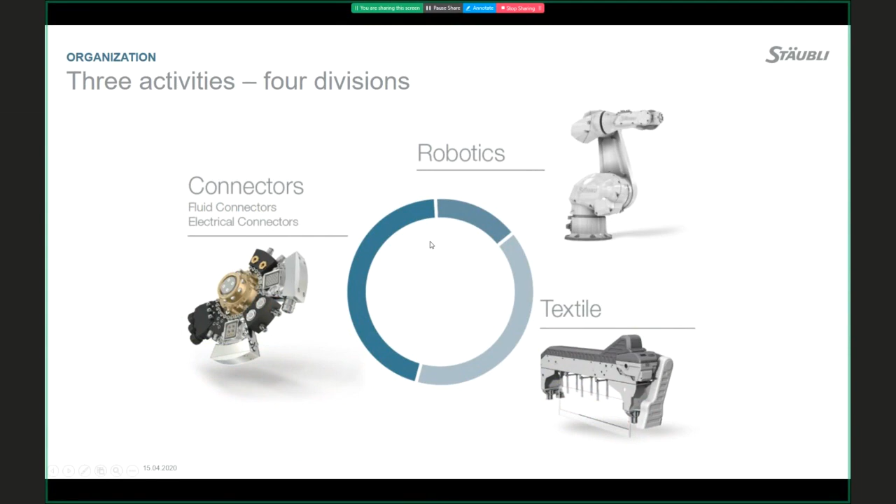Maybe you know the branch from Czech Republic, from Pardubice city. This is our building. We have about 100 employees to take care of Eastern Europe. We have 3 divisions: robotics, fluid connectors, electrical connectors. Also, you can have a chance to meet us with our demo van, where we have connector solutions and robots inside, and we can go visit you at your company.

STAUBLI Pardubice was established in 2005. Now we have 100 employees around Eastern Europe. You can see both companies are active for us. So we are active in Czech Republic, Slovakia, Hungary, Romania, Bulgaria, Slovenia. All of these countries we are active in.

You are probably separated into all these regions, so you have your corresponding sales engineer or technical engineer, so definitely get in contact with him. We have 3 departments: in Pardubice, in Komárno, which is on the border of Slovakia and Hungary, and in Bucharest in Romania. Also, we have a sales department in Slovenia.

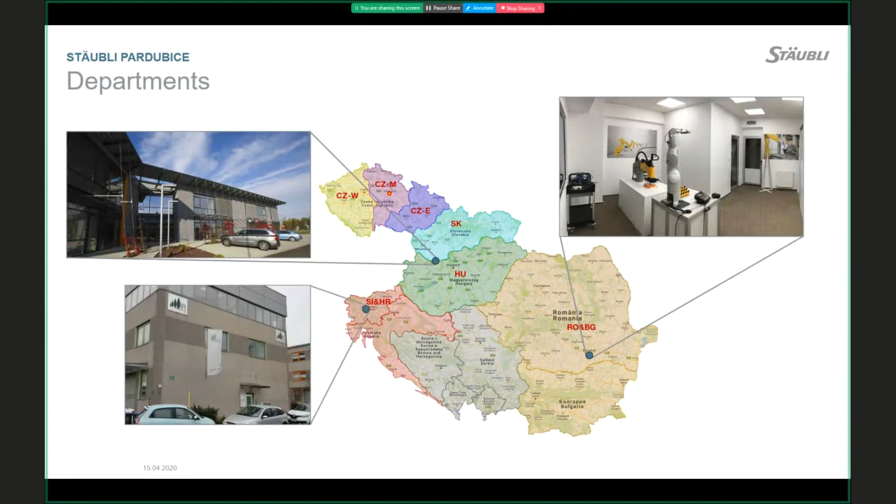Short information about the Department of Technical Sales Support. We provide technical support, verification of solutions, simulations, application support, and training with our local training centers. In every department there is also a training center with robots. So we have around 10 robots in Pardubice, 4 robots in Komárno, and also 4 robots in Bucharest. Also, you can check our websites to know what's going on with customer support and robotics training which we provide, and also you can use the shared email and phone for any questions, needs, or inquiries.

Also, I want to mention in the beginning, total cost of ownership. You probably know, or maybe not, that this term is really important for us. We would like to really take care of our customers with our products, which have a really low TCO, total cost of ownership. It means the complete price that you pay for the system. It's not just about the initial purchase price, delivery cost, and installation.

It's also about some training, consumables, payments per year, fees, repairs and spare parts, some regular service and maintenance fees, which you don't actually have with STAUBLI. Also operating energy and fuel. We will go through the slide where it really shows the energy consumption of the CS9 controller, which is really low. We also have extended warranty: 16 months basic, and if you register the robot, you get 3 months extra, so you have 19 months of warranty at basic from the standard. So I think this is quite good.

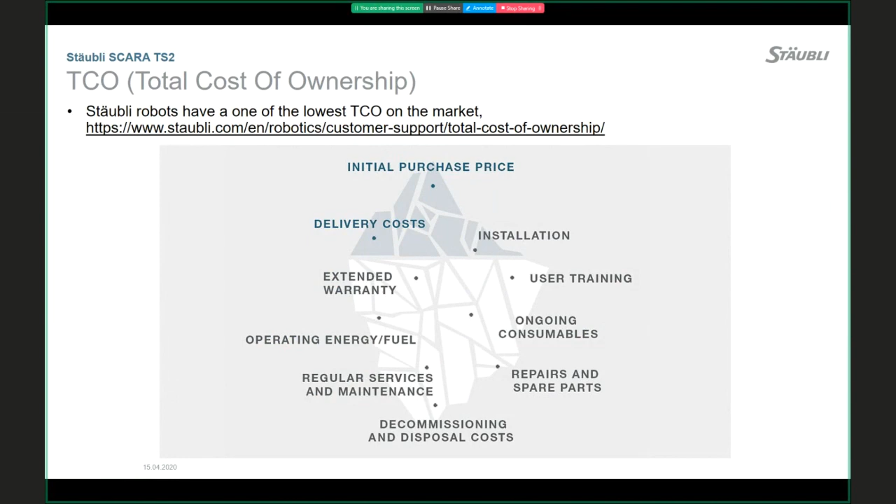We have simply a view of our system, and we can see the product range, which is from the small SCARA robot TS20 up to the new product range, as I mentioned, TS240 to TS2100.

We will have a really detailed presentation about SCARA robots, so I will leave it like that. For now, we have also a fast SCARA robot, TP80, which is used for tracking applications and really fast applications.

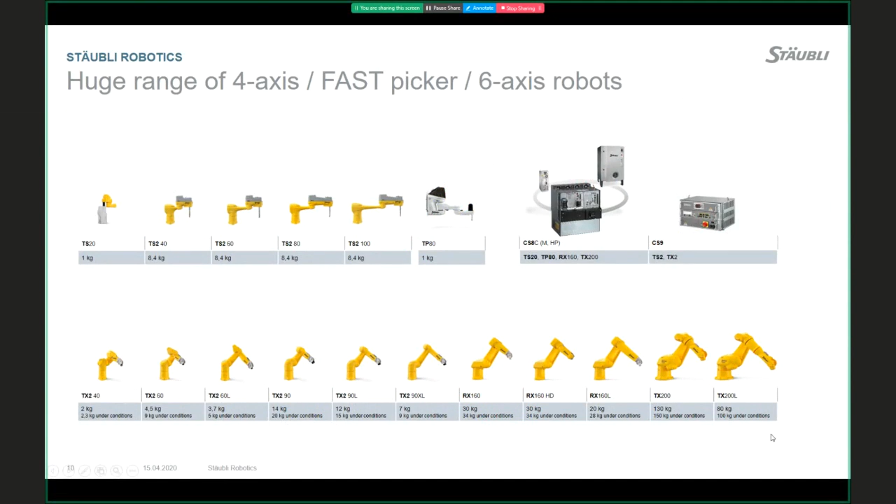We still have from the past the 3 controllers, but really the idea is to have one same controller for all systems called CS9. We will talk about it more in detail during the presentation. And also the 6-axis product range, which you can see below. So come up to the TS2 robot range.

Really nice product range from TS240, which has a 460 mm reach, up to TS2100, which has a reach of 1 meter. The reach is from the center of the first axis to the center of the ball screw.

This robot, like all our SCARA robots, has a complete cylindrical working envelope. It means plus minus 180 degrees. This robot can move around the complete workspace. This is unique. A lot of competitors always have some kind of gap, not able to go 100 degrees almost. So this is one advantage.

And we have a lot of information about our SCARA robots. You see that we have a nominal payload of 2.4 kilograms. It means without a flange, we are able to work under nominal speed with 2.4 kilograms in the whole complete range. We also have information about maximum payload with reduced speed. This maximum payload is 8.4 kilograms, which can be loaded onto the robot.

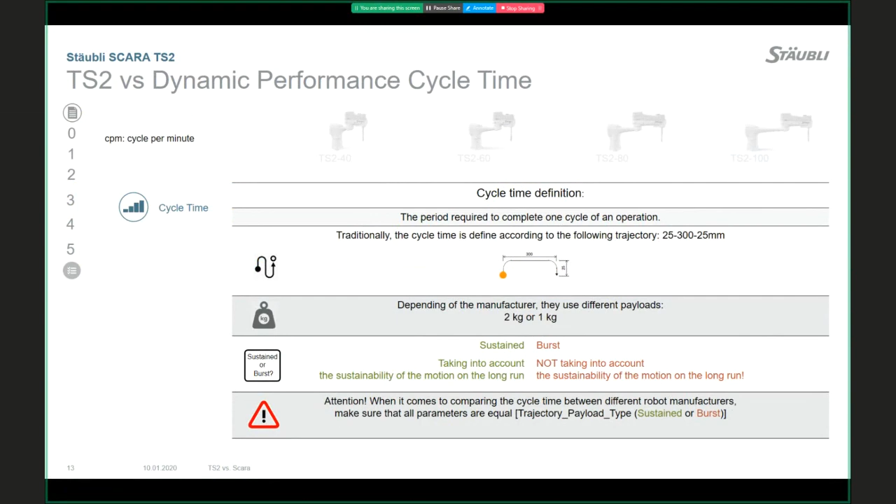Let's go to the hardware of the TS2 SCARA robot. Some of you may know SCARA robots, some may not. You will not find external cabling in our new TS2 product range. Everything is inside, which is really an advantage, right?

Our product range extends also to TS2100. You have a 1 meter working envelope. On axis 1 and axis 2, there is a Staubli gearbox, so we are the only manufacturer who is producing our own gearbox. You can see short videos of how it looks in the presentation cell with all SCARA robots: TS240, 60, 80 and 100. We will go through all the options later on.

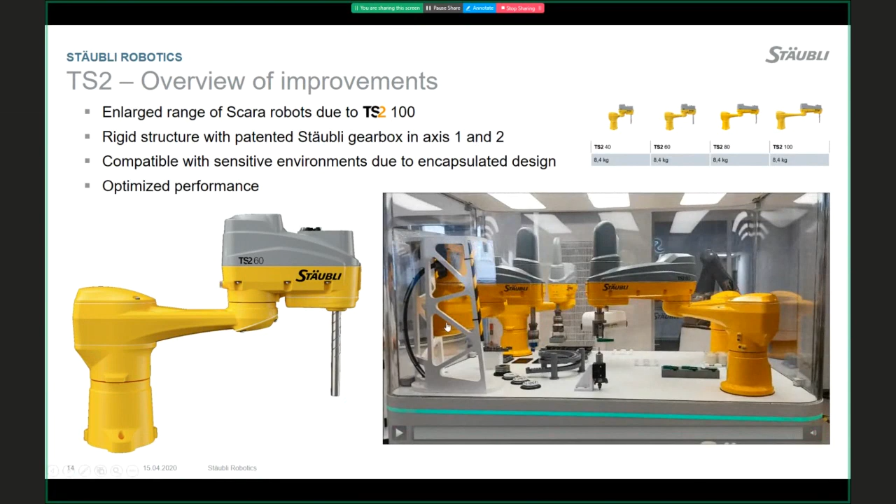You can see that TS2 can be mounted also on a ceiling rail. We are also able to offer you the pedestal on the rail. So we will go through that later. Next slide.

Some basic features: the footprint is really small, like a TX260. So if you have already designed a pedestal for our robot STAUBLI TX260, you can use the same structure.

As I mentioned, we have on axis 1 and 2 the JCS gearbox produced by STAUBLI and patented by STAUBLI, with absolute high-density encoder, which is really unique on the market. No batteries in the robot, etc.

Harness inside, closed encapsulated design, motors inside, and from the standard, if you would like a standard robot, you will have your pneumatics and electrics connections on the forearm. There is also an electric circuit, including electric wiring plus industrial Ethernet Cat 5e.

Also, the design is really smart. You see that all screws are face down. It means no stacking of dirt on the screws. So really clean and hygienic design.

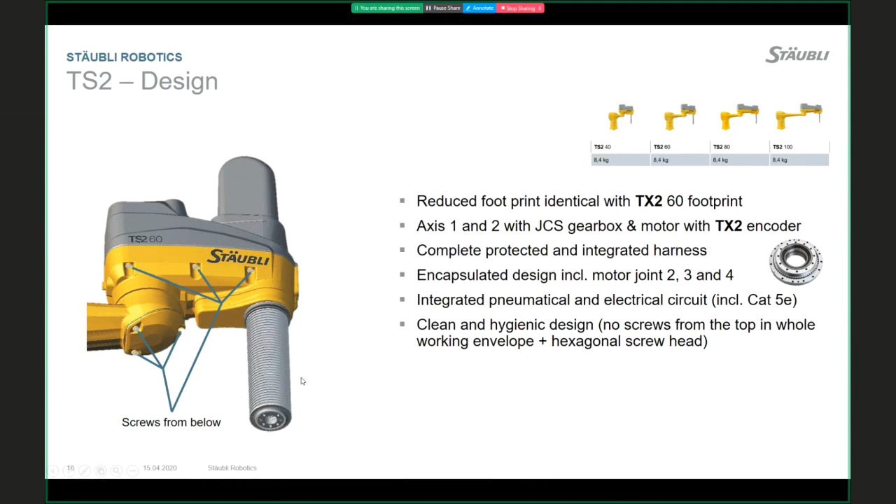You will see a lot of environments can be handled by this robot. So really optimized maintenance - just 4 covers to remove to maintain the robot. It will save your money on production.

You also have practical holes on the robot where it's possible to mount additional loads. So you can use, for example, some Profinet bus linked on the robot, or external valves if you need extra valves, or a camera on the forearm - up to you.

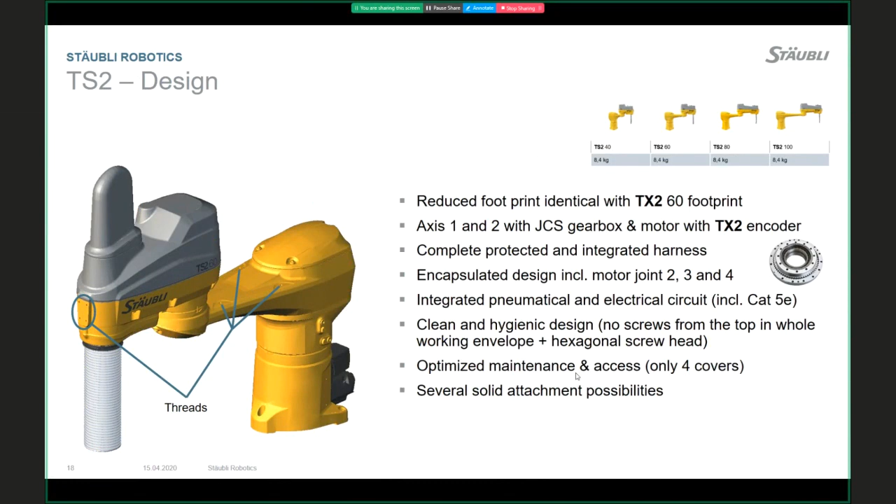Ready to use solution. So if we go to the standard electrical circuit, from the standard, the robot has a direct connection to the foot, which can also be unmounted. You can unplug the cable. But the foot looks like the standard definition of TS2, like that.

There is a 5 meter interconnect cable with gland connection - this is called gland connection. Also from the standard, you have connectivity of pneumatics and electrical to the forearm. There are power lines, signal lines, and Cat5e cable as I mentioned. So this is from the standard.

From the standard you can have no valves, but we as STAUBLI for Eastern Europe, we are providing valves to the robot if you want. So standard is the direct tubes, 3 direct tubes from the base to the forearm.

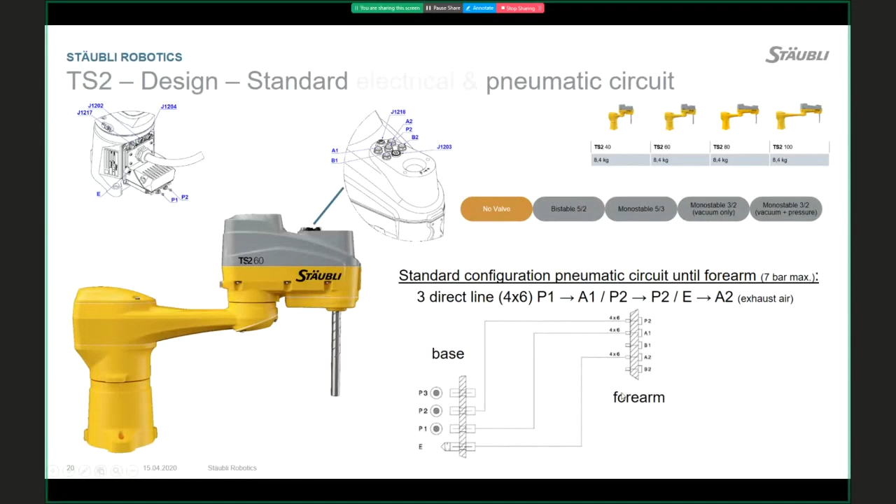If you want to select our option, the valves are located on the back of the base of the robot, like on the 2 axes on the top. There are 2 valves, so it can be 2 5/2 solenoid valves, and you always have an extra direct tube. It can also be 5/3 solenoid valves, always with a free tube on the P2 connector. They are monostable - if you have 5/2, they are bistable.

Also, you can have vacuum in the robot - a 3/2 vacuum system. It's like that. And a new option is the monostable 3/2 vacuum and pressure also, so you can have one valve like vacuum and one valve like pressure. So it uses P1 and P2.

And you can select it if you want from production. So this covers the features about pneumatics, and now we can talk more about the flange option on the ball screw.

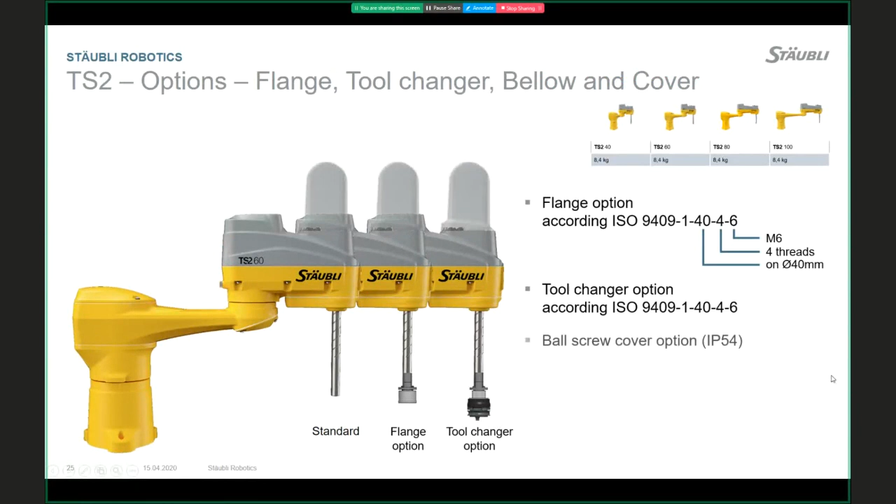Standard is without flange - you can select your flange option, your ball screw cover option, and your bellows. For example, for the food industry, we want to have a robot in a hygienic environment. It means we need IP65, we need the ball screw cover, we need bellows, and we can have a flange or a tool changer - up to us.

Also important to highlight: from the standard, we have a load of the robot of 2.4 kilograms for nominal speed, and for big load, for maximum payload, we can have 8.4 kilograms but with reduced speed. Or we can do some verification of the cycle time and payload for you, and you can go even faster, but this should be validated by technical sales support of STAUBLI on the shared email, as I showed you at the beginning of the presentation.

So with the flange option, we lose 200 grams - we are at 2.2 kilograms. With the tool changer option, we are at 1.7 kilograms.

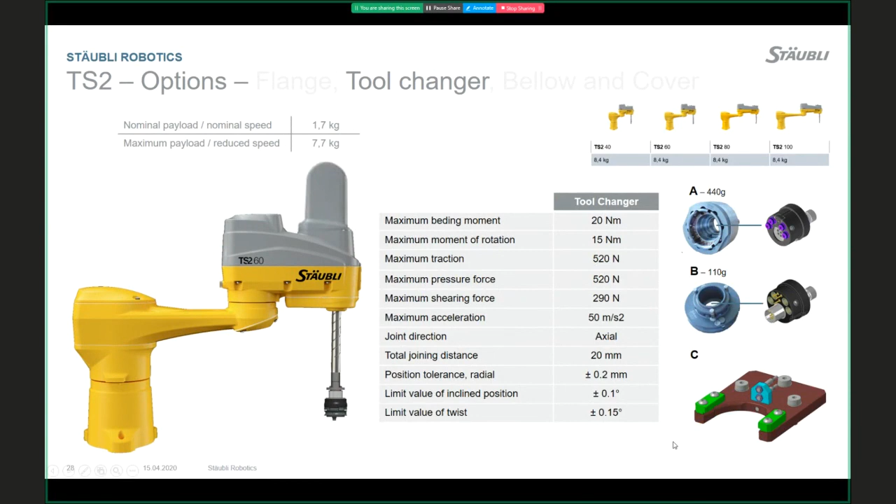We have a couple of technical details about the tool changer: bending moment 20 Newton meters, moment of rotation, maximum traction, pressing force, shearing force, acceleration, etc. Also position tolerance, it's like that. If you need more information, also contact our email for technical support.

The tool changer can be used like a static version. It means you don't need a docking station. You can have your robot side and 2 times tool side, and you can use your manual tools which we provide with the tool changer, and operate it by hand. So it can be done manually, or it can be done automatically by the program, by the robot, of course.

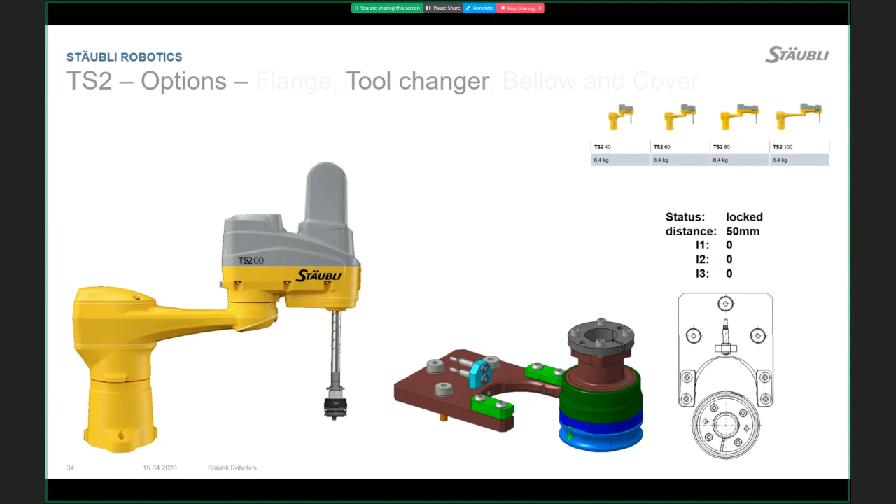So the idea is like that: approach the docking station, go to the tool side, lock the tool side to the robot side, go out. Really fast, honest. So just go to the tool changer, lock the tool side, and go out.

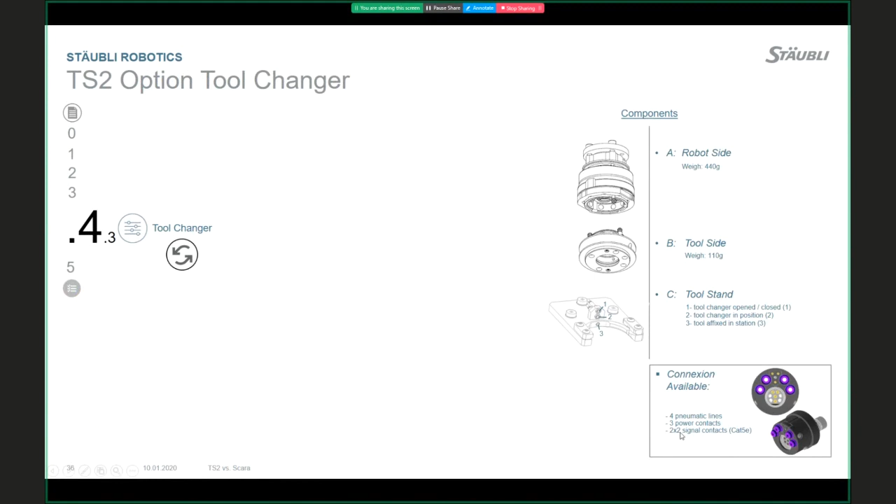So 3 components, A, B, C, as I mentioned. There is also integrated inside 4 pneumatic lines, 3 power lines, and Cat5e signal connections. Complete solution ready to use. It can be automatic or manual, working like a bayonet system. It really increases your flexibility and productivity of production.

We also have an application prepared by the STAUBLI robotics tools team, which is ready to use if you are interested in this option. Please don't hesitate to ask us, or ask your sales representative for this, or our technical support.

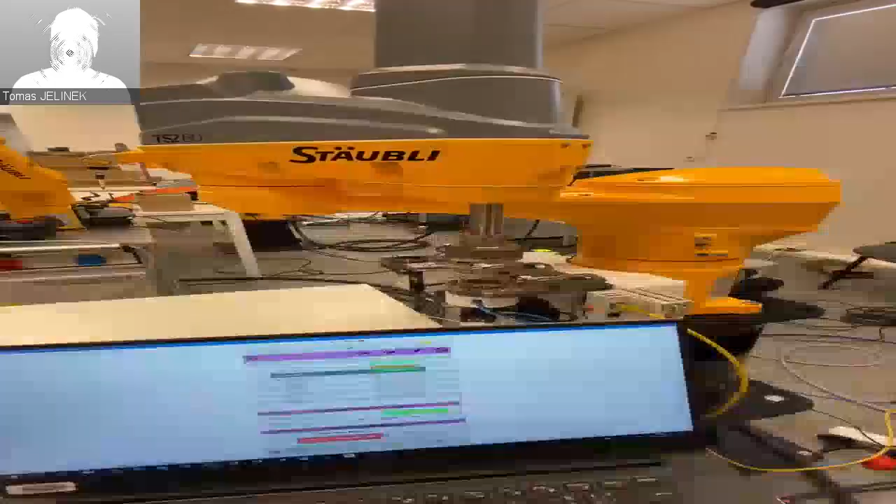The video maybe doesn't have extra quality, but I hope it's visible. We have prepared 3 docking stations with 2 tool sides and 1 robot side. We also have the STAUBLI Ethercat coupler to work with the signals.

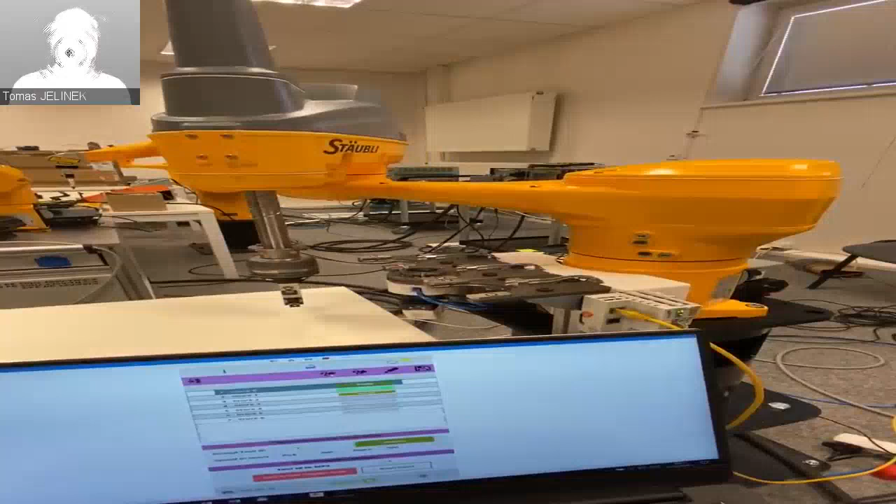We can operate the application from the SP2 or from remote access from the computer. Also it's possible. We just type which tool changer we want to use, and the application guides the robot exactly to the positions that we need.

As I mentioned, the application is ready for teaching the approach position, the frames of the docking station, and later on, approaching every point, it's possible to do it from the application.

So MPS, I hope it's quite clear. If you have a question, just ask in the chat. I will go through the ending of the presentation.

So we go through the options, more options which the SCARA robot has. There are really a lot of them. If you want to use a user interface, you can select the option directly from the base to the flange, and there are pneumatic lines and electric lines. A user interface is available only with the flange or tool changer, but also with the ball screw cover.

This is the top cover.

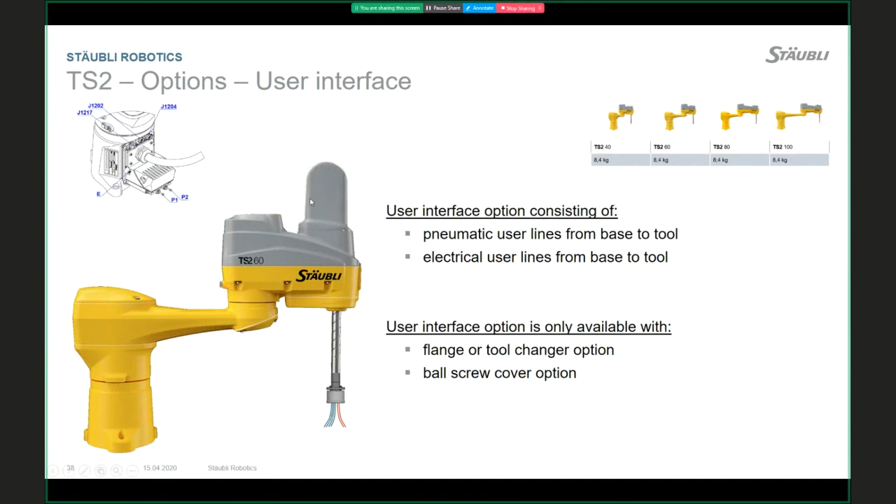So the user interface can be without valves, with flange or tool changer, with direct lines, or it can be with bistable 5/2 valves, bistable 5/3 options. And also the new feature, as I showed you, it's possible to select monostable 3/2, 1 valve from vacuum, 1 valve from pressure. Really interesting solution with flange or with MPS system.

So electrical interface on the flange: there are power lines, signal lines, and Cat5e Ethernet industrial cable.

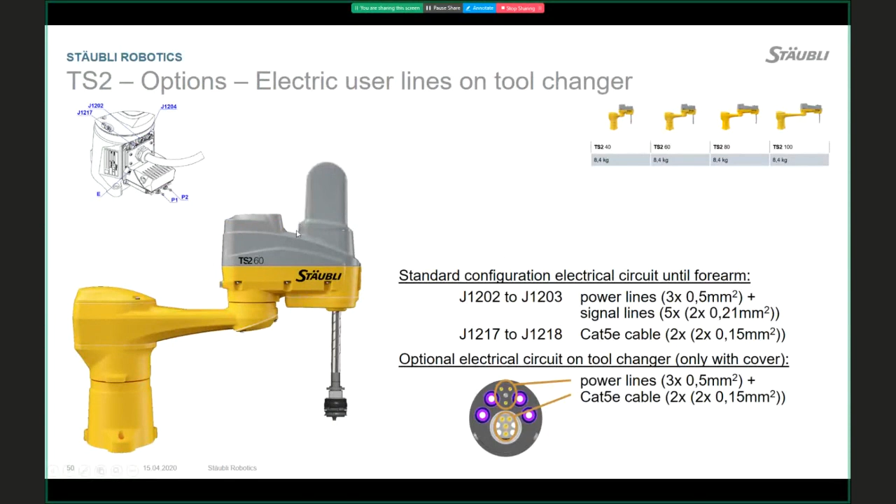In every option you can select if you want electric and pneumatic on the forearm, or with the cover on the flange with the flange solution, or with the MPS solution. With the MPS solution you always have just this socket, which is highlighted on this slide.

So you have 3 power lines and a Cat5e cable, and 2 lines with 2 wires of this dimension.

So the robot can be floor mount or ceiling mount. Also, which is our advantage, is arm connection under the base. The robot can have all cabling, the DSI board, and also pneumatics and interconnect cable from the vertical cable outlet.

We are also offering our certified H1 food oil and grease. It means that the robot is able to work in a food environment, can be in direct contact with the product, and will not contaminate the final production or final product. Certified H1 oil, ready to use with the robot.

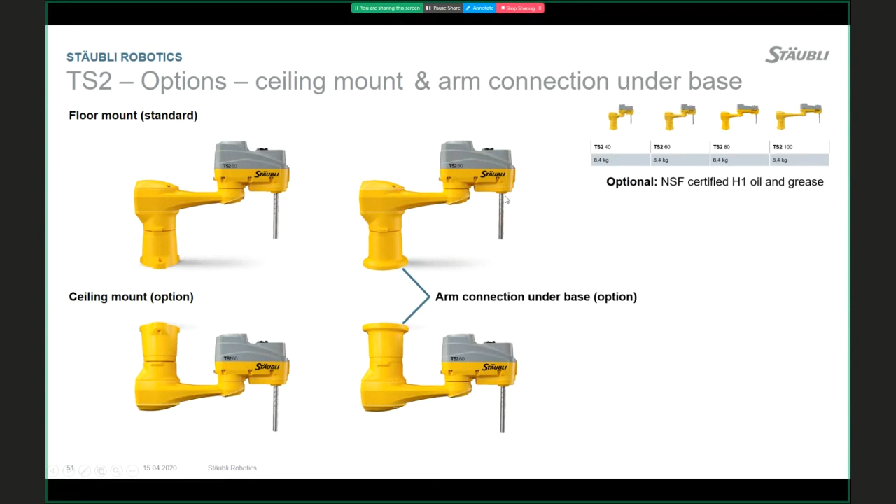It always depends on your application. The robot can be standard, just with H1 oil, or it can have a flange, cover, or bellows to cover the final product. So, as I mentioned, from standard there is a gland connection directly to the robot.

But as you probably know, at STAUBLI we have our product Combitac, an electrical connector which is ready to connect and disconnect maybe a million times. This is a really high advantage product, so you can select this Combitac connector as an option.

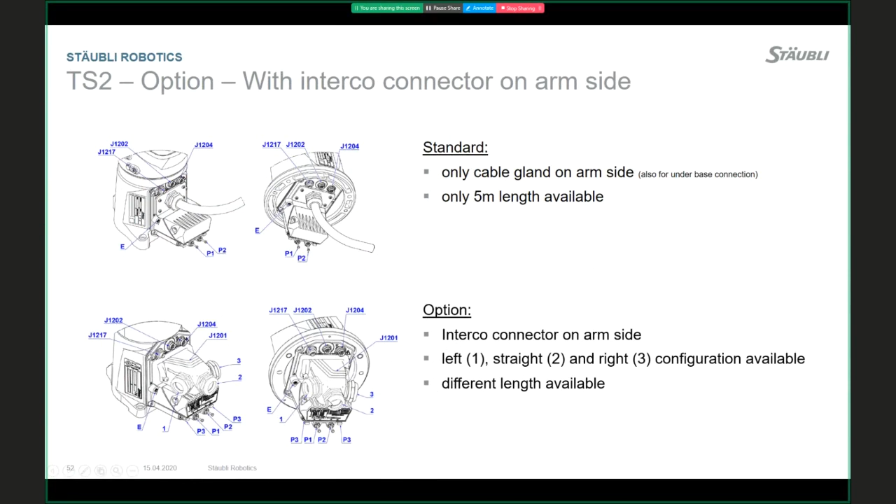Also you can select the cabling, from which side you want the outside cable: 90 degrees left, 90 degrees right, or straight. Also a vertical cable outlet is available for that.

You can have hard stop axes on axis 1 and 2, because for a small cell you need some safety verification and your robot has to stop somewhere. So you can use your hardware stops on the first and second axis.

No SCARA robot on the market has brakes on axis 1 and 2. Our R&D in our production unit is working on it, so during, let's say, 1 year, there will be an option like brakes on the first and second axis. But in the meantime, you can use your hardware stops to extend the security of your cell.

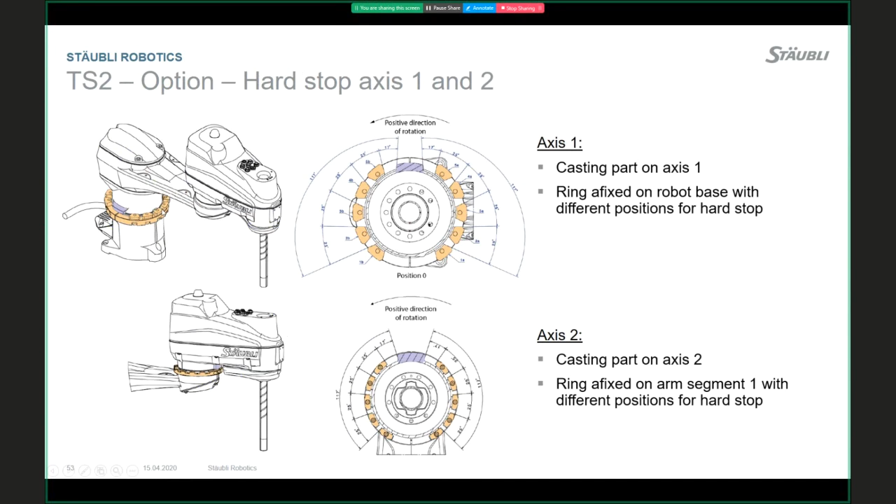You have a compact cell. Usually like a ring, you have casting on the axis which you just select, your segment where you want to stop the hardware-led robot, and you can do it like that.

System summary: as standard you will receive the CS9 controller with the SCARA robot TS2 and the manual pendant. If you have multiple robots, you can have only one pendant, and you can have the plug in the CS9 controller. This plug is called on-fly.

Now our CPU system can work for 30 seconds. You can disconnect your SP2 and your robot can still work in remote working mode. If you connect the plug during those 30 seconds, your e-stop is not cut and your robot is still working. So, a really good and new solution.

I would like to mention the environments we can see. The standard environment we call harsh environment, meaning standard automotive production, ISO clean room class 5 for the TX robot and also the TS2 robot. So this is the standard version with encapsulated structure, small footprint, identical cabling on the forearm for both robots, and integrated pneumatic, also the same on both robots.

Precise, fast, consistent. You can have the ESD version of the robot, prepared for electrostatic discharge production from PCB production to electric parts production, certified conductivity throughout. There is new painting on this robot with high conductivity, and there is one single cable connected to every axis to the same zero. So this robot is really for electronic assembly, electronic test, and electronic packaging.

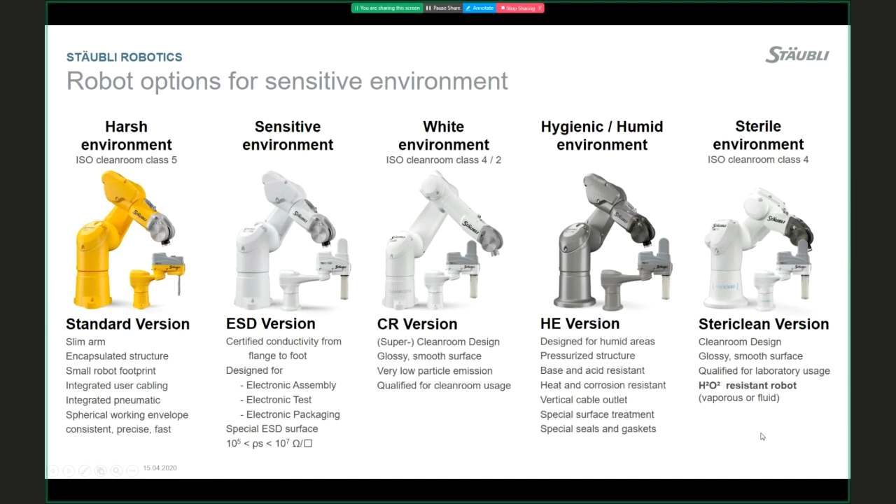We have a sterile environment, meaning ISO class 4, designed for clean room use with vapor or fluid resistivity, H2O2 resistant robot, able to work in laboratory use, filling liquids in glasses, etc. So, a complete slide about the TS2 HE robot variant - this robot meets the highest requirements for hygienic equipment.

So this robot has to have vertical cable output. It means that the robot is covered versus fluids, so fluids cannot go inside. The robot can have H1 oil, meaning food certified oil. The robot has chemical resistance of pH 4.5 to 8.5, so the robot is able to work in environments corresponding with this pH.

A robot has to have full options, as we mentioned in the beginning slides. It means vertical cable output, closed structure, ball screw cover, bellows, flange or MPS system. It's up to every company which will provide. Now, also possibility of cleaning this robot by every cleaning product, like Ecolab, etc. So these features are available.

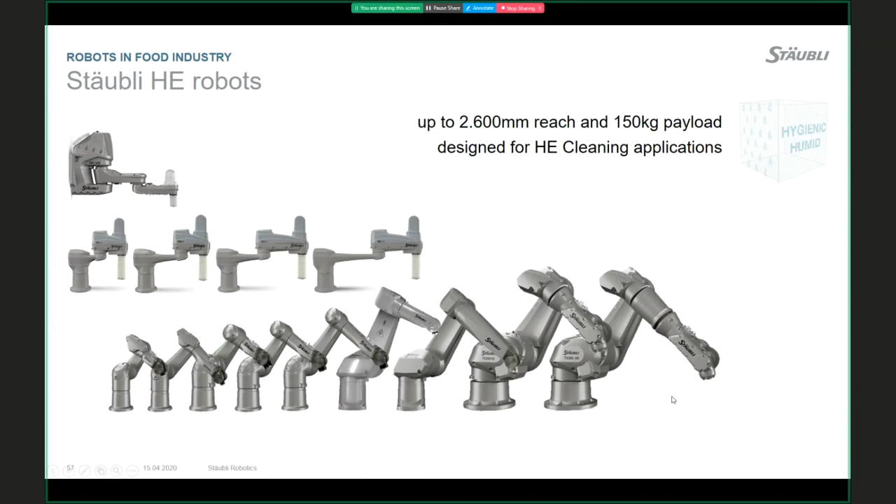You can see that STAUBLI is ready for HE environment, for humid environment. We have a product range of HE robots from TP80 through TS2-40 to TS2-100, and also for TX2-60 up to TX200L. Every robot is called HE, humid environment. So we are ready for cleaning applications, for food applications, to really operate the robot in conditions where competitors can't. So we as STAUBLI, we are ready for harsh, ESD, hygienic, aseptic and clean room environments.

Also, the robot can be pressurized by the press system, so we can really fill the air inside the robot and keep the highest IP level and the highest cleanliness of the robot.

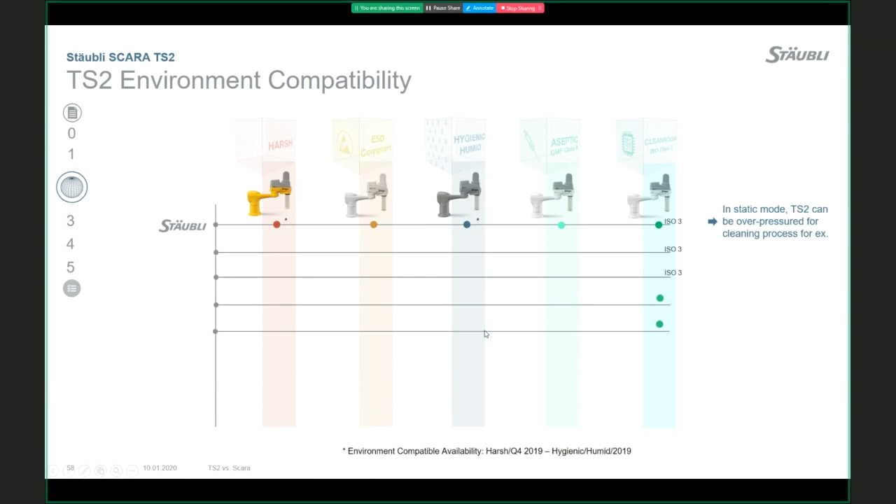I prepared for you some comparison between our old system TS and the new TS2 SCARA robot. So let's check the features. Maybe a lot of you know our product range SCARA TS, which was this robot with the cabling outside and plastic cover, etc.

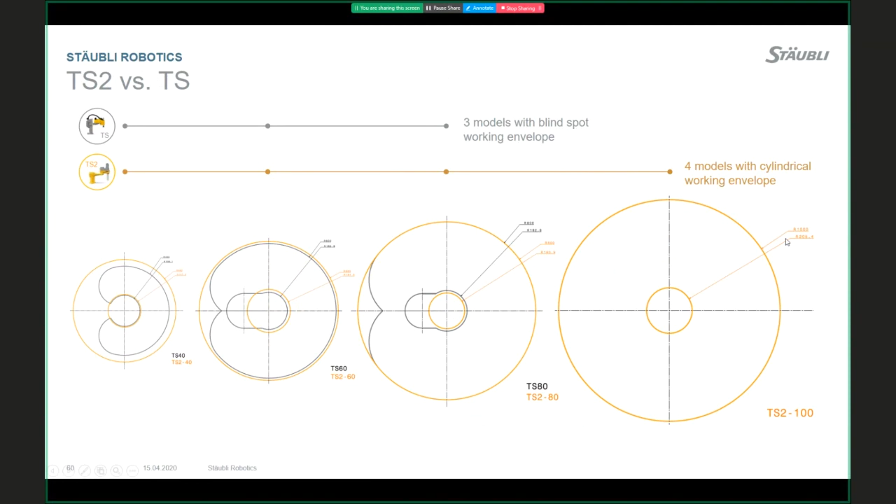It was 3 models with blind spot working envelope, but now TS2 is able to operate, as I mentioned, plus minus 180 degrees on the first axis. No blind spot. You can operate every position on your product range and on your workspace. So 4 models with cylindrical working envelope. See that you don't have any space with blind spot. You have your working envelope on your complete range. So this is the first advantage. As I mentioned in the past, the competitors always have some kind of gap. The TS2 doesn't have it.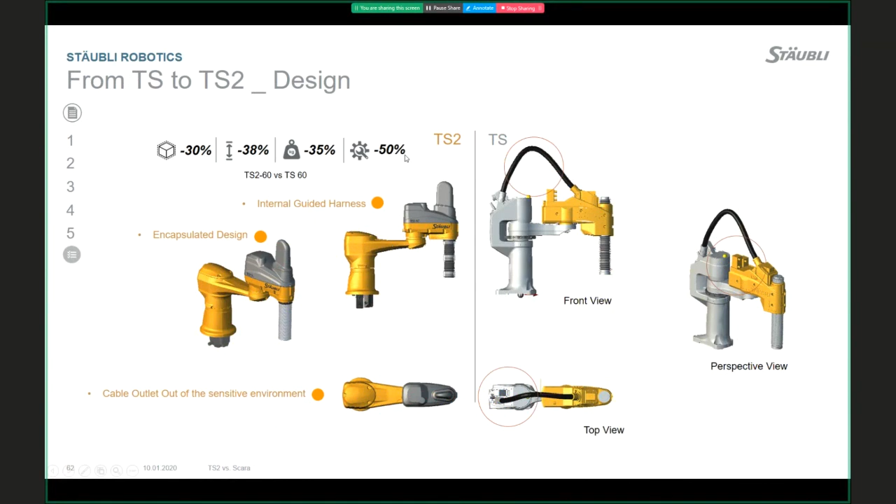And if we compare TS robot range with TS2, we have minus 30% of the space usage, minus 38% of the size, minus 35% of the weight of the robot, and minus 50% of the maintenance and maintenance fee. Really, this new TS2 robot is quite unique. You can have it here on the screen visible.

If we look at the numbers, we have reduced weight from 55 kilograms to 38.7 kilograms, so minus 35%. Footprint is identical with TX2, 60, it means really also smaller footprint. Compatibility with TS2, TX2, also maintenance compatibility, same DSI board as you see here, same connections, same also interconnect cable.

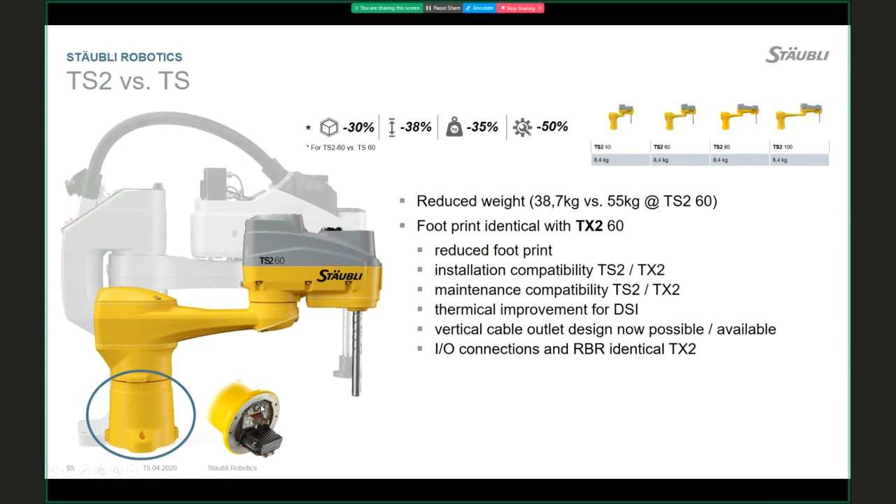Thermal improvement for DSI, vertical cable output ready, connectors of I/Os and RBR, remote brake release. So if you have external remote brake release, you can use it also on the TS2 robot.

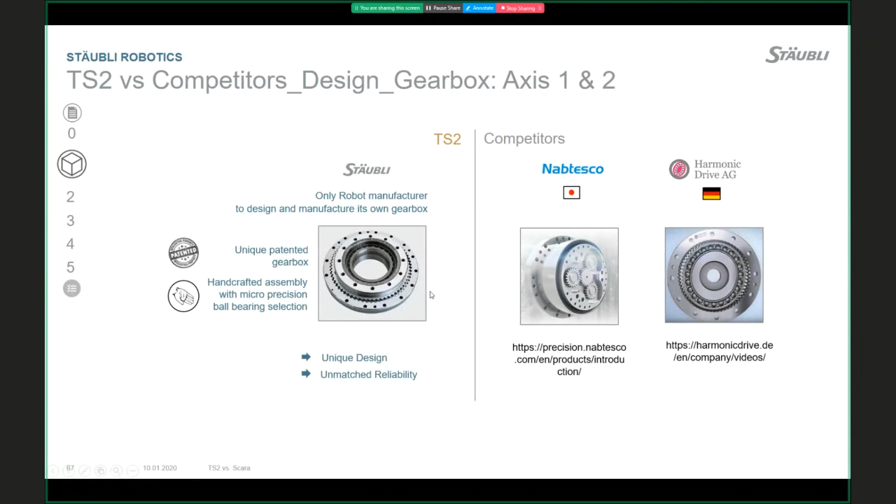Also, there are no gearboxes from other brands. Other brands have on axis 1 and 2 JCS gearbox technology, designed and manufactured by the STAUBLI company. Usually in Japanese robots, it's Nabtesco gearbox used. Also, Germans are using harmonic drive, but STAUBLI uses our own patented gearbox with a hole inside for the cabling, to have a complete closed structure of the robot. This gearbox is a handcrafted assembly, meaning that every gearbox is done by a human with micro precision, with double checking in the production unit, unique design, and a planetary system.

Also, our maintenance is quite better, and the motor hours where the oil has to be changed are quite higher. In TS2 robot you need to change the oil every 20,000 motor hours, at competitors you have to change it every 10,000. Your gearboxes you have to replace at 40,000 motor hours; in our TS2 SCARA robot, if you need to change it, it's at 60,000 motor hours.

So twice less you need to exchange your oil, so you save 50% of your money over the lifespan with the JCS gearbox. So your total cost of ownership, as I showed in the beginning, is really reduced with this robot. We want to highlight this, and give strict information to our customers that with TS2 you will save your money.

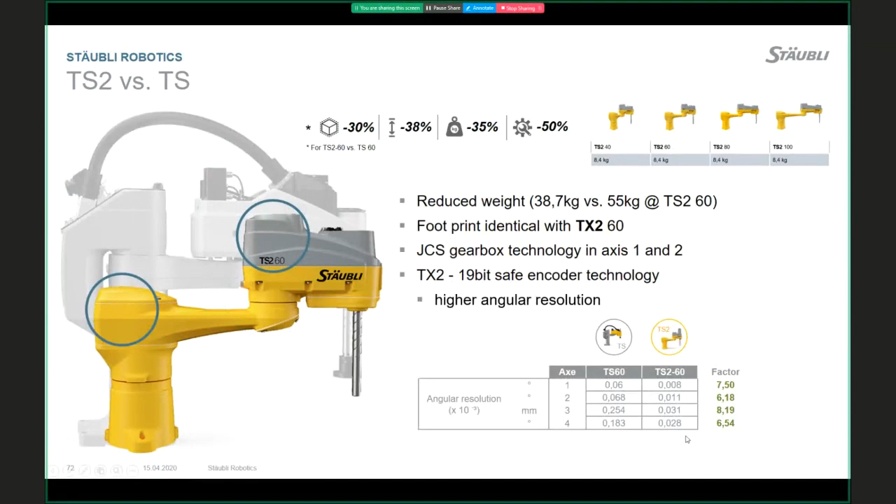The TS2 has higher stiffness with internal harness, with IP65 possible. Developed with hygienic screw heads, meaning most of the screws are face down. There's no possibility for dirt to get stuck on the robot, so it's easier to clean.

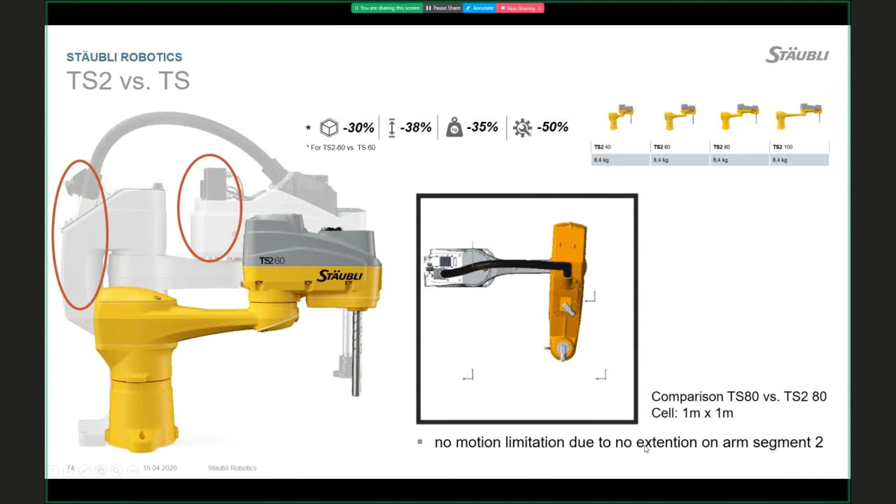Also, what's nice to highlight is that our old SCARA robot had a huge second axis, but our new TS2 robot has a really compact second axis. There's no possibility of collision like that. It's really more compact, TS2. So in a small cell, 1 meter by 1 meter, you can operate your robot. No motion limitation due to no extension on arm segment 2. That's true.

Also, there is a difference in the fourth axis - there is a removed joint gearbox for this axis, so it improves joint accuracy and there are fewer spare parts to use.

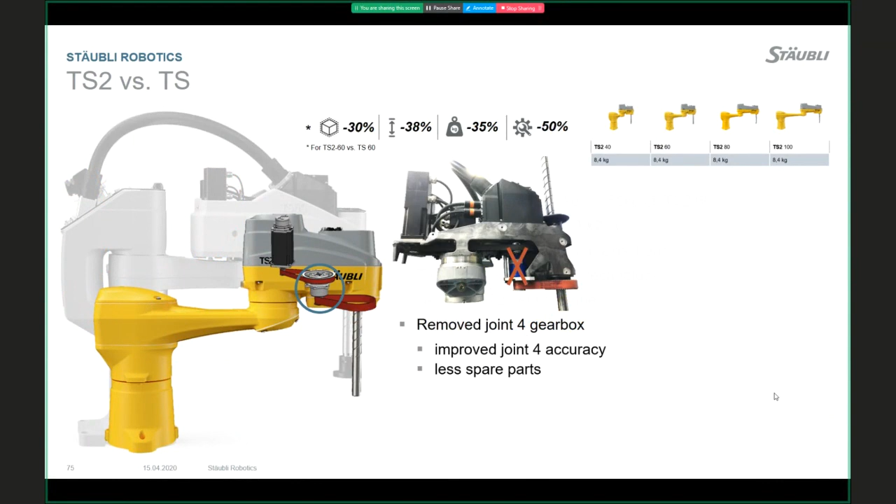Integrated valves if you want, as an option, and compatibility of tool, of your program code, of course, and your valves available. So what you design for the TX2 robot, you can use directly on SCARA TS2. You have the same possibilities - same valve, same electrical wiring, everything can be supported with the product range.

The robot is ready for sensitive environments: ESD, HE, aseptic, food, clean room, and Stericlean.

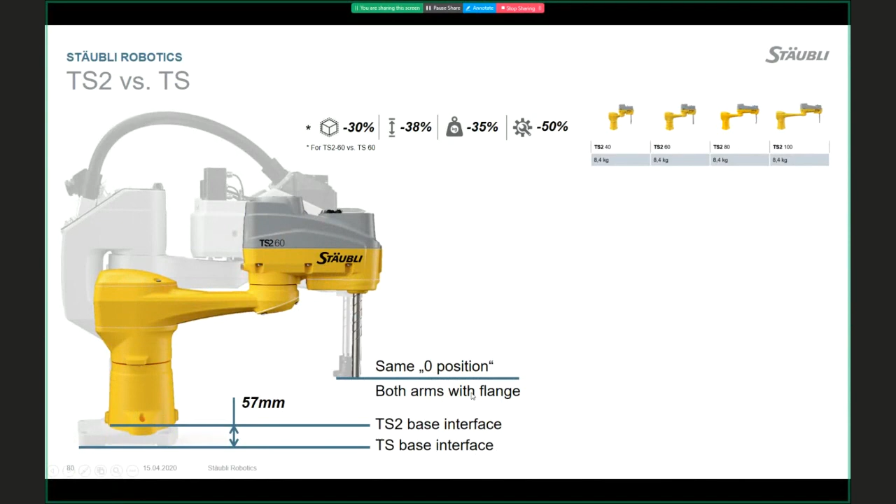That is also a more compact position. It's also longer from the base to the ball screw, corresponding with the TS robot. As I mentioned, we can also provide the pedestal, the console unit, as a reduction compared to the old TS robot and TS2 robot. So we can offer you this console.

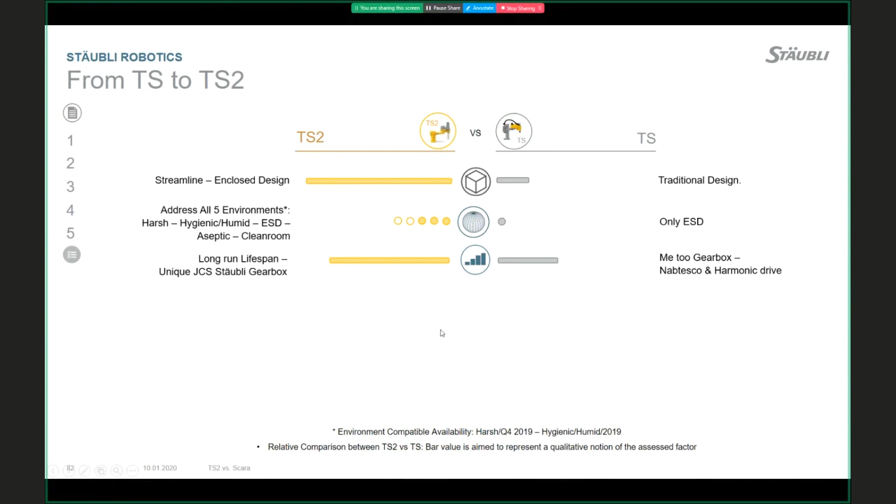Summary: enclosed design compared to old product range SCARA robots. Also all 5 environments I mentioned: harsh, hygienic/humid, ESD, aseptic, and clean room. Unique JCS gearbox on SCARA robot, 2-changer flange and IP65 protection, 4 models with cylindrical working envelope, and also controller optimization.

Some of the parts are the same through the product range. So the main highlights of TS2 are: unique design, suitability for all types of environments, unparalleled performance, flexibility, and energy optimization. Our new product.

One thing I'd like to mention, as promised during the presentation, is CS9 controller energy efficiency. Corresponding to certain norms, the robot has 15% less consumption compared to the previous generation.

The robot uses energy recuperation during movement. We also have saving and sleep modes for controller fans and for the SP2 system. So if the robot is braking, it's used...

...to generate energy and electricity, which is re-injected into the motors when needed. We have a standby mode controlled by the CPU that can deactivate drives if the robot is not active, or if the robot is not powering the arm.

Ventilators are used only at the beginning; later, if not needed, it will slow down the speed. And we have the SP2 standby mode.

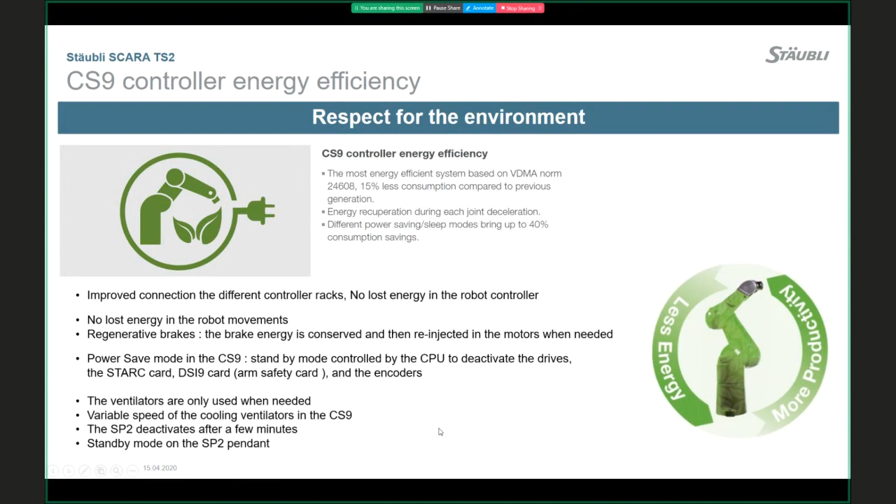Also, we have a tracking application, a new VAL product, VALtrack, with the CS9 TS2 robot. So I can play a video for you.

This is a real application from our STAUBLI department where we tested tracking with the TS2 SCARA robot. There's a camera getting position information, the robot reads the conveyor position via encoder, and tracks the part on the conveyor. Later on, in the real application, it can be further tuned.

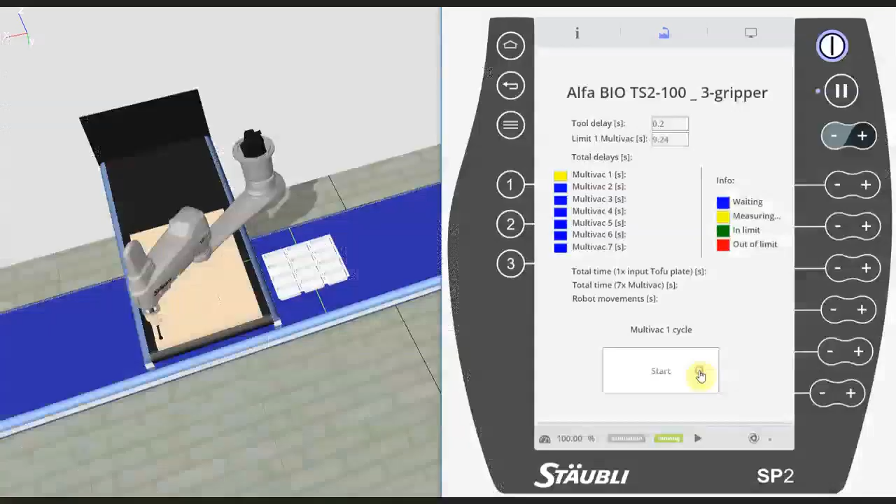Also, as promised, here's a cycle time simulation, so you can simulate your SCARA robot in SRS Studio or other simulation software. You can create your own SP2 view, calculate your cycle time, and verify the time the SCARA robot needs for palletization or whatever application you need.

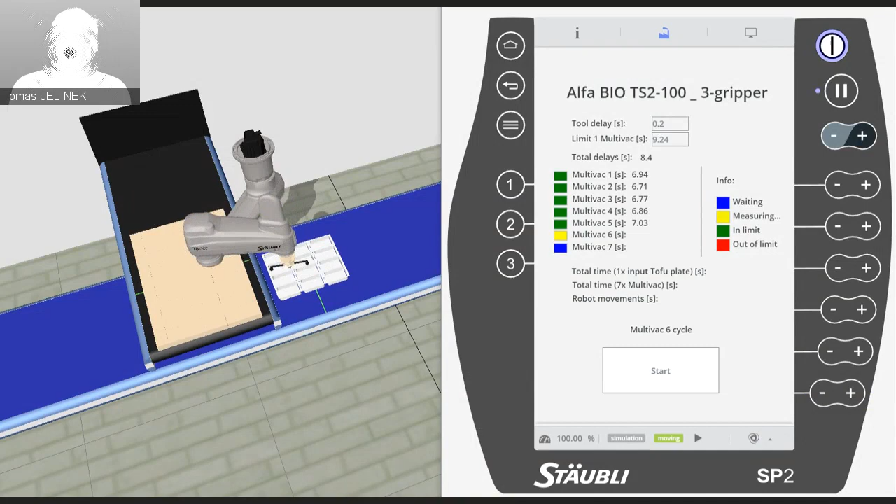If you have a real project, contact your sales rep or technical engineer, or if you don't have a contact, we'll definitely share our contacts in the chat message. If you want a simulation like that, just ask us—we're able to help you with your solution.

Just two slides about the CS9 controller, and then we'll continue with real videos of applications, and we'll go slowly to the end.

The CS9 controller is one controller for every robot, every product range of STAUBLI robots. We are slowly adapting our product range to this controller, and in the future there will be only one controller, CS9. You're able to drive the robot using our own VAL3 programming language, a structured programming language.

It's an advanced robotic language for high-end and tailored applications, usually used by integrators, companies, and OEMs. We have VAL products ready—for example, the Valtrack application you saw is done with Valtrack. This is our complete program package, ready to use with the conveyor, the camera, and the robot.

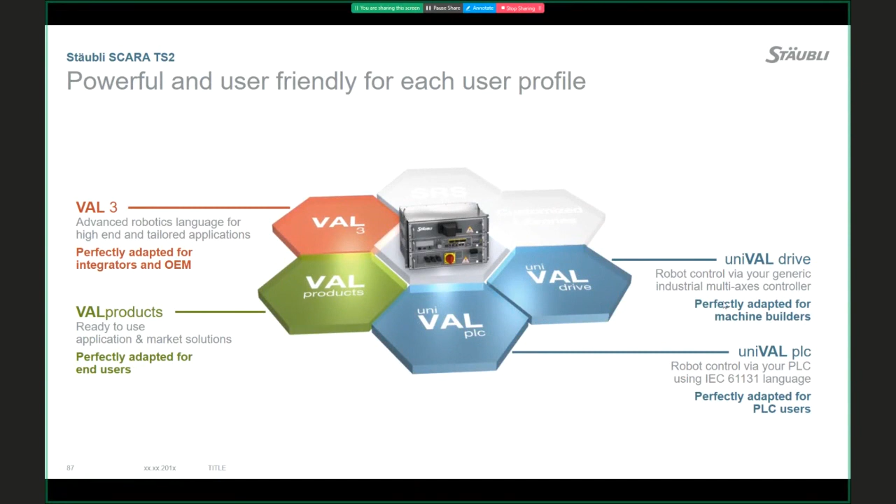They've developed this solution with us, with the STAUBLI production unit, so that Unival Drive acts as a bridge allowing the PLC to control the complete robot, but at the hardware system level. So you need to control the movements, the motion generator, the micro increments of the movement. This Unival Drive is perfect for machine builders with a strong PLC to drive the robot.

Okay, last slide about the CS9. This is the shelf system with the power, CPU, and communication rack with the arm—three drawers, multi-voltage. This means the 6-axis robot can be 40-60 single phase, while the 90 is only 3 phase.

The SCARA robot TS2, as we mentioned, can be single or triple phase—just select it in your product option verification. Okay, new logger, external 24-volt input, ready to use, USB ports, and an LED display.

So that will be all from the presentation, and I will play some videos and take some questions if there are any.

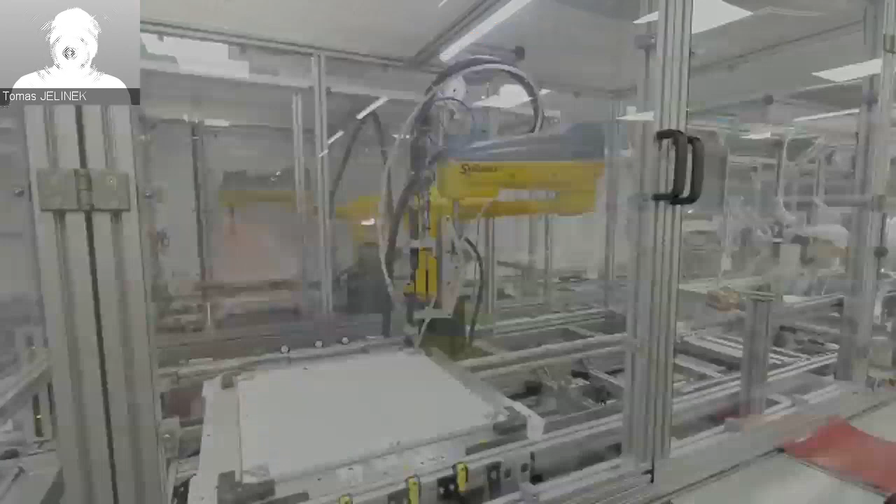Also used like a screwdriver.

The robot handles 4 kilograms and moves over a longer distance—from one side to the other, the robot is able to move 2 meters.

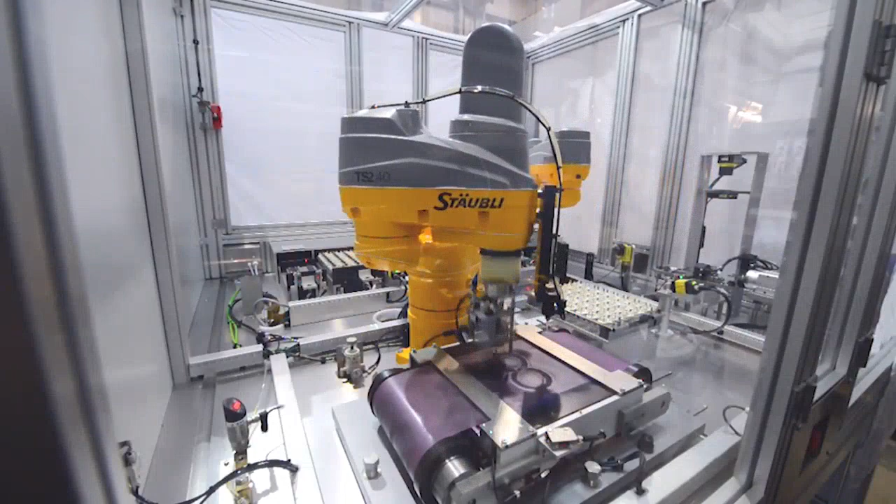So it was the mapping application of the SCARA robot TS2. I have one really nice dynamic video of the SCARA robot TS2, providing the basic features of this robot.

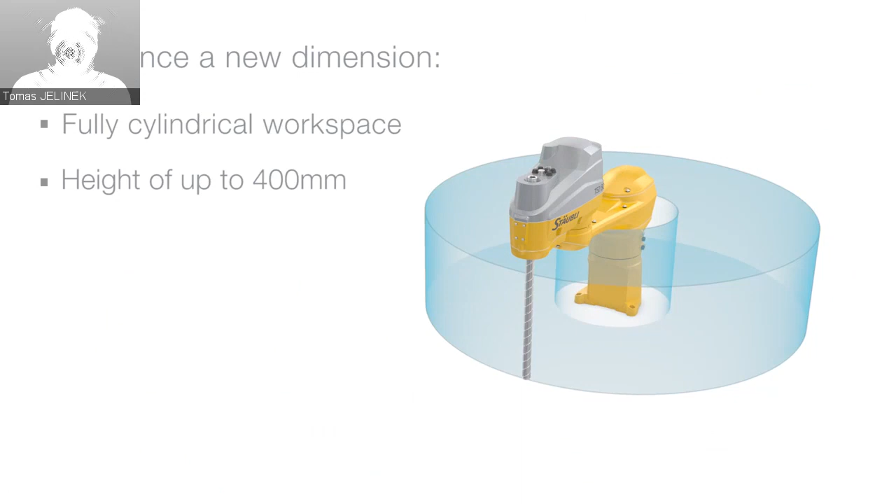The robot can also have a 400mm stroke. Usually standard is 200mm, but the robot can also have 400mm to work with. As we discussed during the presentation, there are a lot of environments. Also same controller with TX2 and TS2 robot. Connectivity is the same, and the structure of the MPS system, which I presented, is ready to use. Also, as I mentioned, the different shapes of the robots are used across the SCARA robot product range.

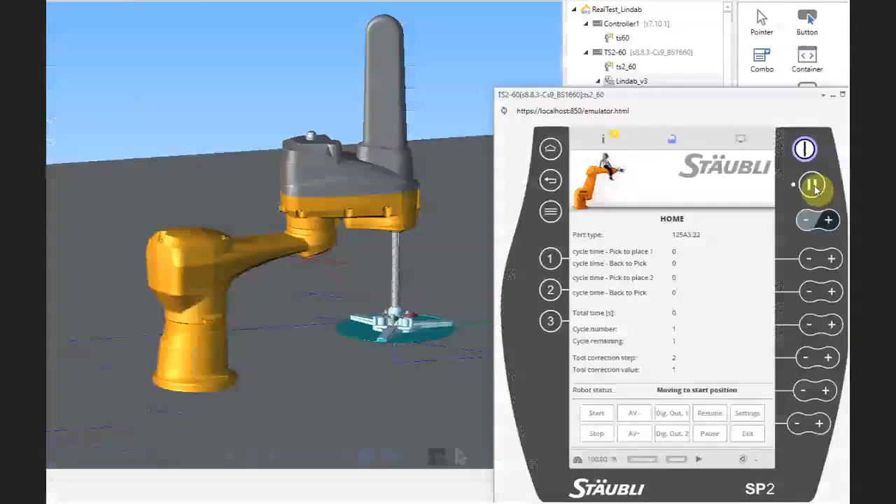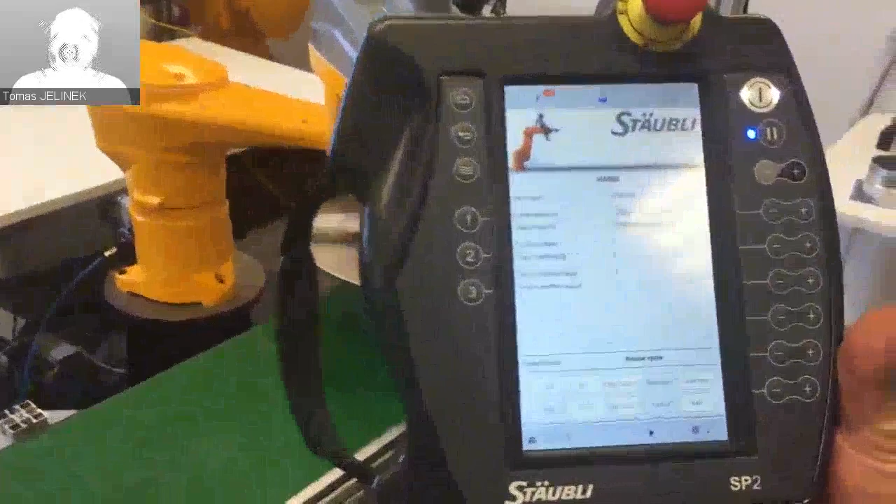It's possible to simulate the SCARA robot in SRS Studio. You can see this is the 400mm stroke robot. You can do simulation like that with your tool, with your part. You can do verification of your cycle time, and later on you can do also a real test, and we can provide this for you if you want. If you have a real project, no problem to do the real test for you like that. So before it was a simulation, later on the simulation can be sent to the robot and do the cycle time verification.

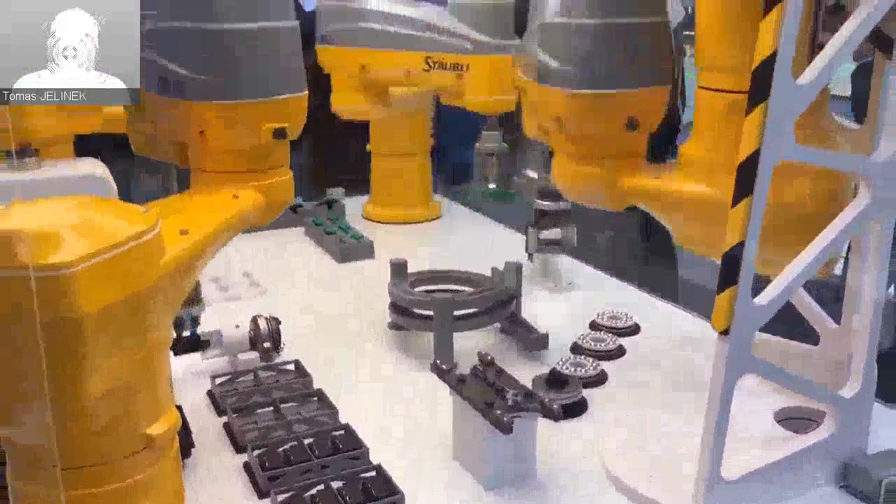Also, some of you saw our presentation cell where it's visible four complete robots - 40, 60, 80, 100, with every feature available. So you can see the video now. There is one robotic tool changer, there is one with flange, and there is one with ceiling option.

So I will play a 3 minute video now of the product range. If you are interested, you can stay and watch it. Some of these videos are available on the YouTube channel, as I mentioned.